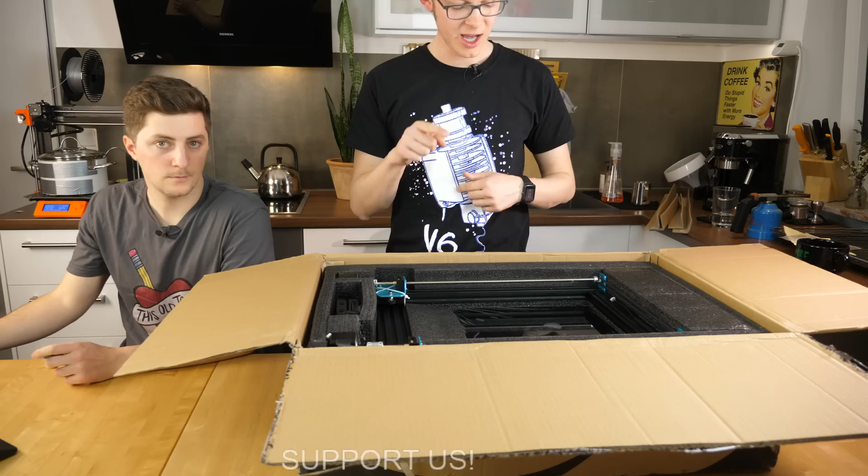That's going to be interesting, and I'm quite excited to see if it's also scary. Some parts right here, maybe - there, the spool holder I think. Oh yeah, yeah, tools.

That's nice, it plugs directly into the heat bed. I hope not, actually. Yeah, let's see. It just doesn't sound like a good idea to, you know.

I mean, every water heater you use to make tea or something is directly mains, but yeah, it's nothing. I'm not sure how it is in Germany and other countries with things you assemble yourself that are directly driven by 220. Yeah, it might be okay. I think, yeah, you're the electrician. Yeah.

Yeah, you want? No name. Are you streaming from Germany? Yes, we are streaming from good old Germany. We are streaming from the very south tip of Germany, actually.

Oh, beautiful foam packing, to be honest. That's really, really nice.

Damn it, should I take the box? Yeah, maybe, I just don't know if there's anything else in there. Nope, I don't think so. Do we have a manual? Ah yeah, there's a manual. Okay, you can give me the box. Yeah.

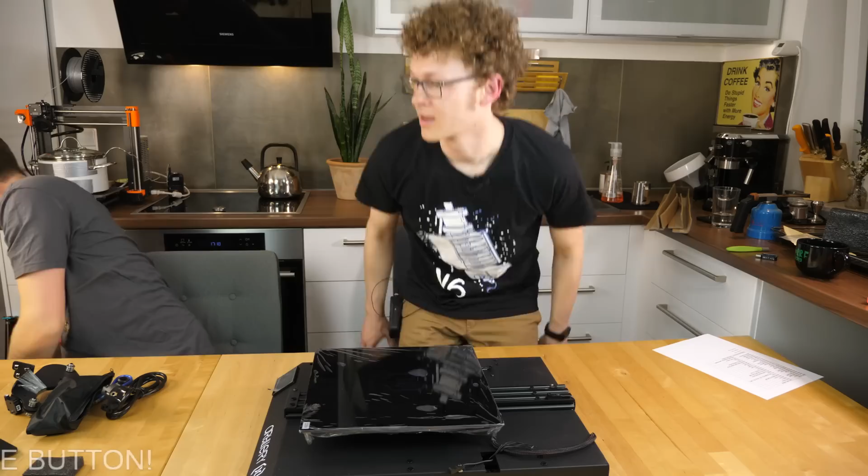Oh god, okay, I hear a screw in there. Yeah, yeah. Wow, oh okay, that's a big unit. Yeah, that's a really big unit.

So as I said previously, the nice thing that I already like about that machine is that all of the enclosure, all of the electronics, are enclosed in here, which is totally cool. We have the 220 volt bed, which is great.

I'm sure it heats up pretty rapidly. It should - they say right here in my cheat sheet that nozzle heat up time is under 3 minutes. Yeah, we'll see how that works out, and we'll also see how everything is protected.

Just for you guys, please enjoy that moment. That's why we usually have the close-up cam.

One thing that I'm noticing right now is that the USB and micro SD card slots are facing upwards. So I'm pretty sure you'd get debris of material or something into the card slot and then you're screwed. Could be, but it's also really nice that it's way better accessible than on other printers, so you don't have to fiddle around somewhere below the printer.

On the other hand, if you lose one of your micro SD cards in here - oh yeah, that's the next thing - it's gonna be gone. Yeah.

I think before we unpack the print bed, which is glass, or glass ceramic as it says right here in my cheat sheet, we'll crack open the electronics and take a look on the inside, because I would really like to know how they actually wired the mains, and what mainboard they're using and what drivers they're using.

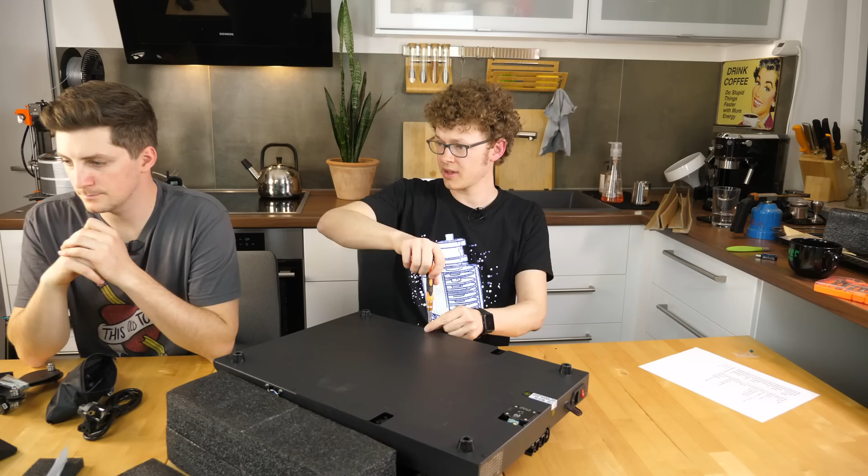Simox, what do I think about the JG Aurora A5S? I can't really say something about that printer because I have never owned one. So yeah, please ask other people there, I'm really sorry.

Someone's asking if the bed has an auto bed leveling sensor. Yes, it should have one. Could you say that again? I think I didn't hear it. Sorry for the pronunciation.

Do we see how many guys are watching actually? Maybe go out and get back in to see if that works. No, did he screw it? No, not yet, there's one thing right here. It says we got 330-ish viewers. Thank you guys, thank you for being here, that's a pretty awesome number actually. Cool, 336, that's even more. Thanks for watching everyone.

I really appreciate you all being here. One thing I wanted to mention, they don't want you to open the box right here. This probably says something like warranty void if opened. So I guess that's something with some kind of certification in terms of the 230 volts, maybe.

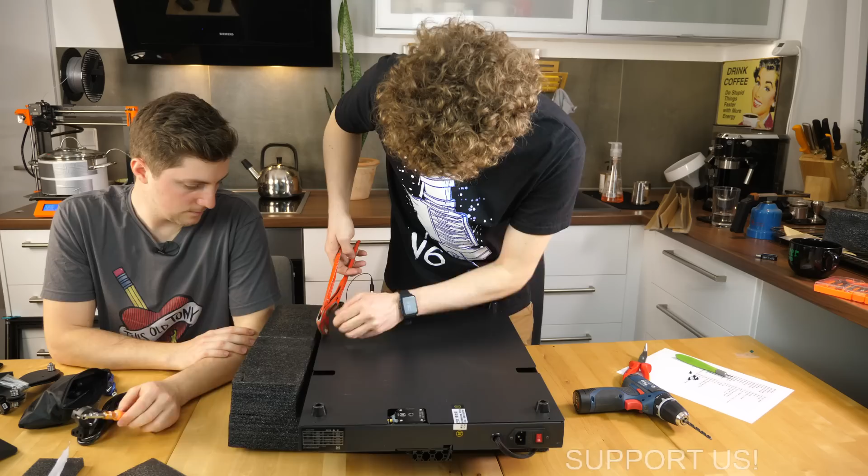Let's see if that is working. That is not good. Or you have a crappy screwdriver. Well that was close, no, I don't really think so.

Well do they have some tools? Oh yeah, do you think this tool is better, the Chinese tool than the other Chinese tool? We'll see. I think it's gonna be this one. Give it a try. Oh yeah, it's totally busted. That's not much screw left in there.

So we will bore it open just for the sake of science. And in order to avoid the chips, I even have a vacuum. Oh yeah, you can give me that. Oh wow, thanks for the $5 donation. Thank you, Robin, by the way, you got a very nice name, by the way.

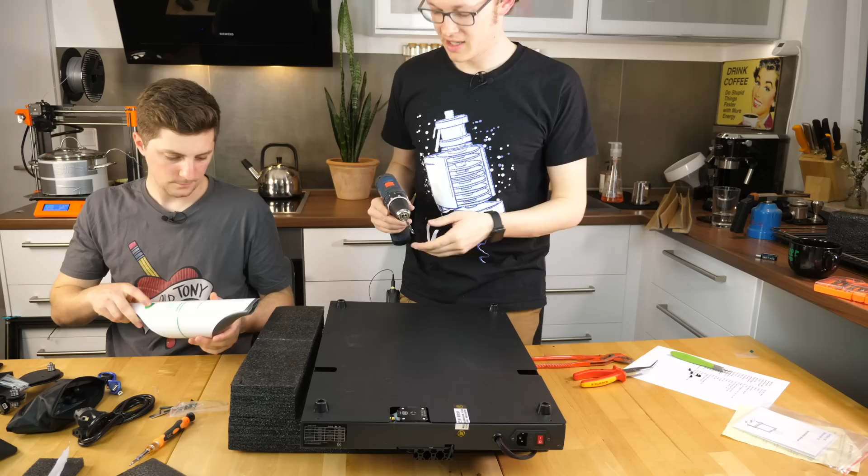Okay, so sorry for the sound. What the hell? Oh yeah, I don't know if... there's a turbo button actually. It is? I think the plus, the upper one. Oh, that's 2 buttons? Oh wow.

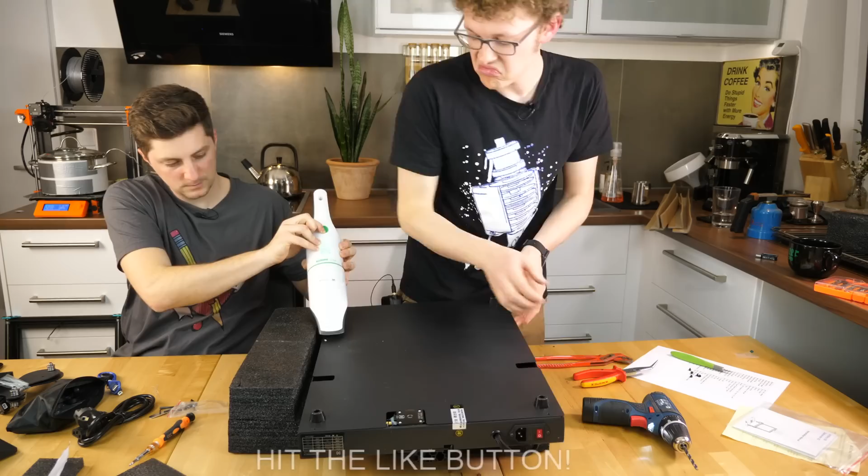Yeah, you got it almost. Okay, are you bending it? Yeah, I'm bending it, sorry guys. The noise is not bad, okay? That's good.

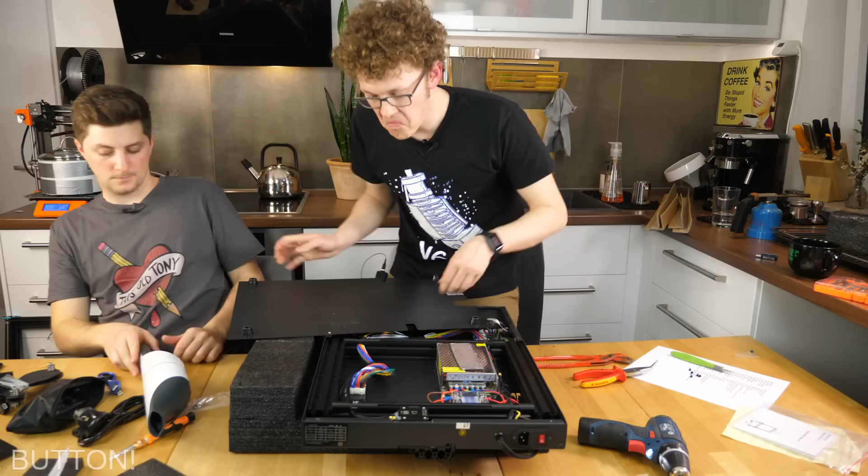Oh look, the electronics are on the opposite side, so that's good. But still, why don't you keep drilling? Yeah, I should probably just keep drilling. Industrial music, yeah, that's right.

Oh wow, there we go. I don't think that's one step in the user manual. That was the anti-tamper screw. This may be the mechanical equivalent to the magic smoke.

Yeah, okay, but he's a mechanical engineer, so I'm not worried at all. You're an electrical engineer, so we should be fine. So that's not my business. That's not your business. Okay, yeah, I'm really unhappy that we don't have

a small camera, but yeah, maybe let's give you guys an overview. It looks pretty interesting in here. I could operate the main camera. Yeah, well go ahead and see if that works out. That is the nice thing about being here, not alone, that you have a dedicated person. Do we have autofocus and all that stuff?

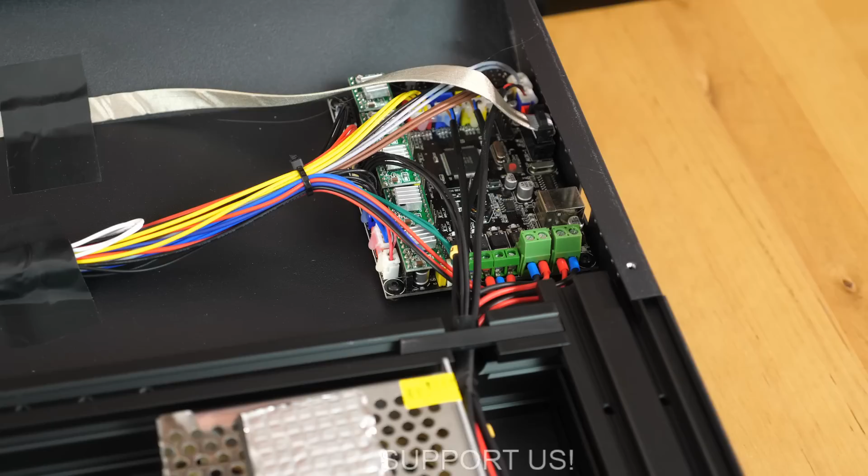But that would actually allow you to remove them and replace them with other ones, probably for quieter ones. But those guys were saying that they were already using quiet stepper motor drivers, so I suppose they might actually be Trinamic ones. But well, I don't really know.

For the sake of science, let's remove one. Is it not too tight? Don't strip it... no, it's fine. It says, it's not a Trinamic one, it says

FS31W0. So if anybody knows what an FS31W0 is, please leave a comment in the comments.

But it looks pretty good actually. The wires are taped to the case, and what I'm seeing from here is a second method to ground, to keep the covering lid grounded. But it seems everything is powder coated, so I don't think that this is really... it's probably more or less just so it doesn't touch and vibrate or make any sound. I also think it's against vibrational noise.

Yeah, I'm really happy with this in here, no complaints from my side. There is some hot snot on some of the connectors right here, but everything else is fine.

The only thing I would note, but I'm not sure if this is just in Germany, is that the neutral is normally blue and not red. If I take a look at the plug, we have a blue and a red one, so usually we'd have blue and black, or blue and brown. But yeah, they just didn't use two blue wires, I don't know, whatever.

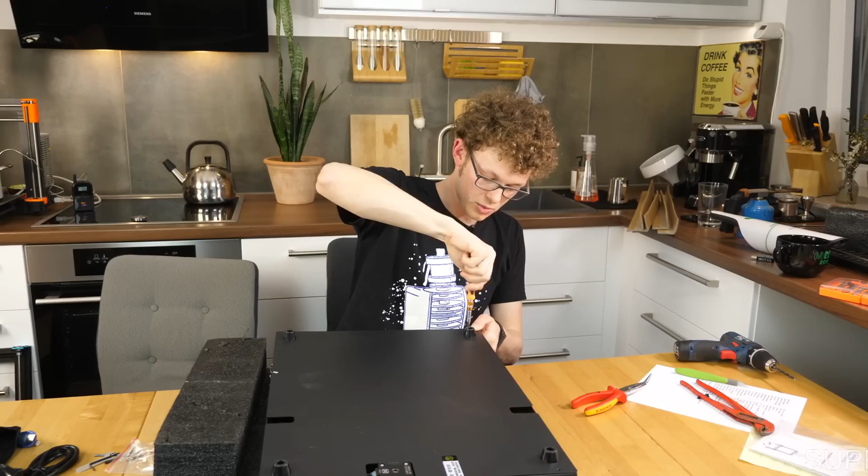All right, so much to that. Let's just close this up again, make sure we haven't totally ruined it. But as I said, this is just for the sake of you guys, so you know what's on the inside, and if you ever get one of these machines, you don't have to crack them open yourself right when you get it and void your warranty, your Chinese warranty, which I don't even know if it exists.

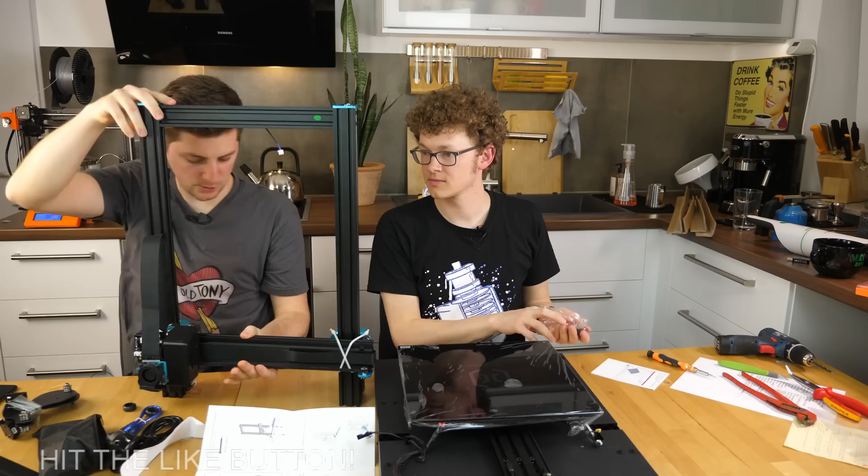Which is kind of sturdy, but it also has the rollers on the V-slot extrusions. The design is really similar to a CR10. As I said, the only real difference is that the extruder is different because you have a direct extruder, this long nozzle - the volcano style hot end - and you have a print bed sensor.

And they're using nice flat flex cables for the connections. As far as I can tell, the only 3D printed part is actually the fan shroud, or what seems to be the fan shroud - another one right here. So the holder for the trapezoidal nuts, that's also 3D printed.

I actually don't have a clue where Artillery 3D is coming from. Somebody said that they're somehow connected to Evnovo. I don't really know, so I don't know what their experience with making 3D printers is, but so far this is kind of a nice machine.

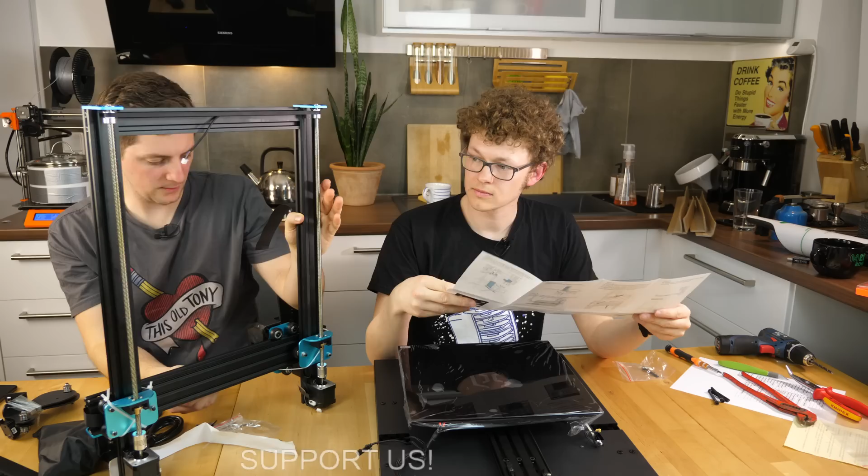I mean, the belt tension is pretty much non-existent. But that's probably something which is in the manual, which we have to configure and set up. How do we actually do that?

You got the screws, or are they in here? Yeah, I'll give you the screws. We'll tilt that and you can screw it in from... okay, you got it? Yep, I got it. Can you just tilt the box? Yep.

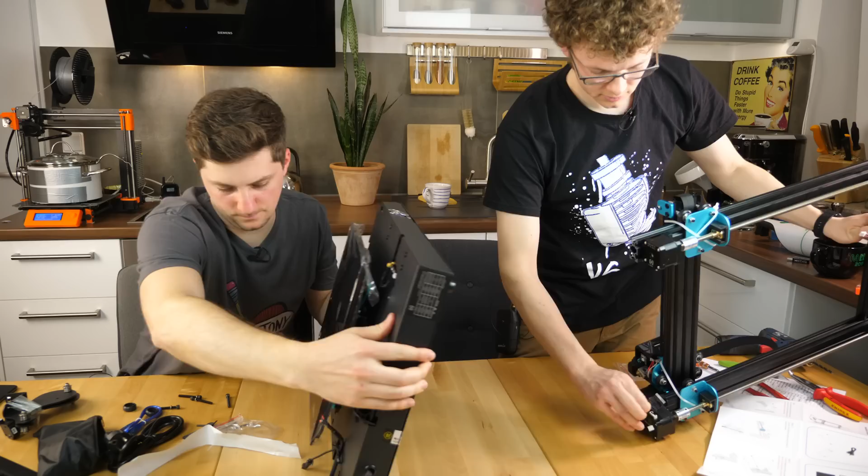Man, this is one heck of a printer. And the heat bed is insulated from the bottom, which is also a good thing - there's maybe a centimeter of some kind of foam, which is wrapped in foil.

Looks good. You actually tilted it the wrong way around. Oh, I did? You don't want to screw it in from the bottom? Nope. Okay, people would be laughing at us if we would do that - if you would try it. Okay, that kind of sucks. Can you just maybe put it at a 45-degree angle? Because I think...

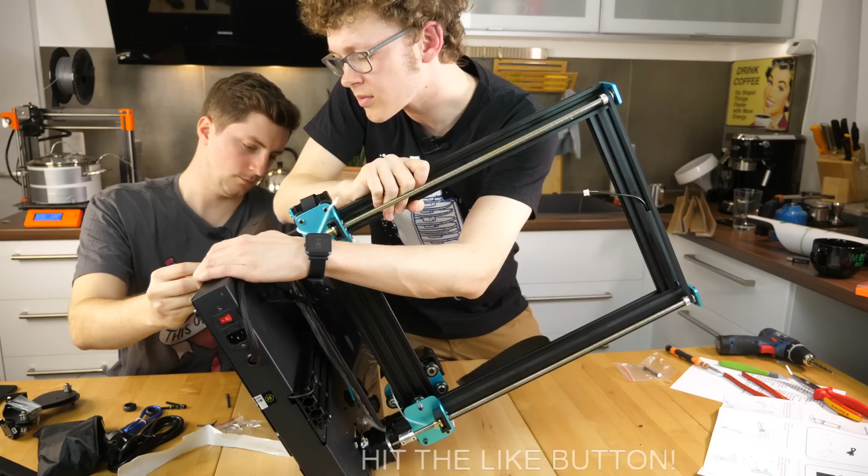This might be a step which is a bit tedious if you are alone. You got it? Okay, yeah. Is it biting? No, not yet. Ah, wait a second. Yeah, got it there. You go.

Putting these huge gantries in place is always tedious. This is also one of the things why I really enjoy that Robin is helping me out. Actually, I'm just here for the sous vide meat. Yeah, but these are actually the things I have to do to get it. So you always need to work for something, for your reward.

Another interesting thing is that we have 2 stepper motors for the Z-axis, which is nice. We also have a belt on the top to sync them, which is also really nice. I don't know if they use something special during the leveling procedure to get the whole x-axis perpendicular again. We'll see that later, probably.

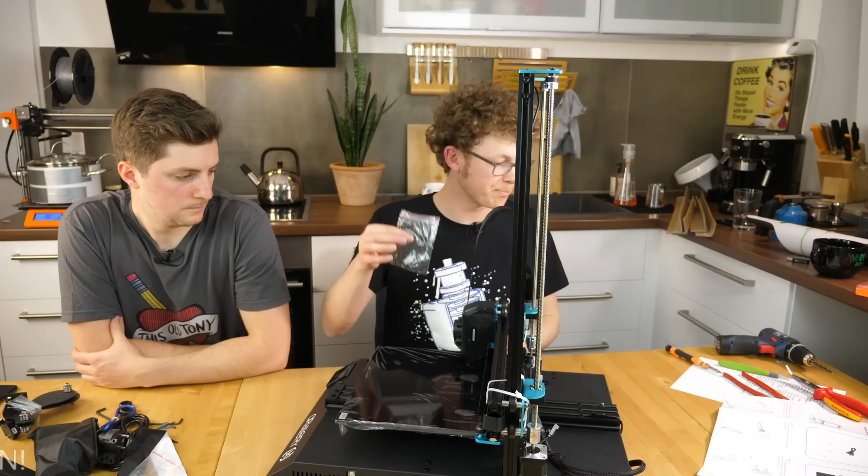Luke is asking what the zip ties are for. The zip ties are for holding the x-axis into place during shipping. We will be removing them later. They actually sent a spare screw, which is kind of nice.

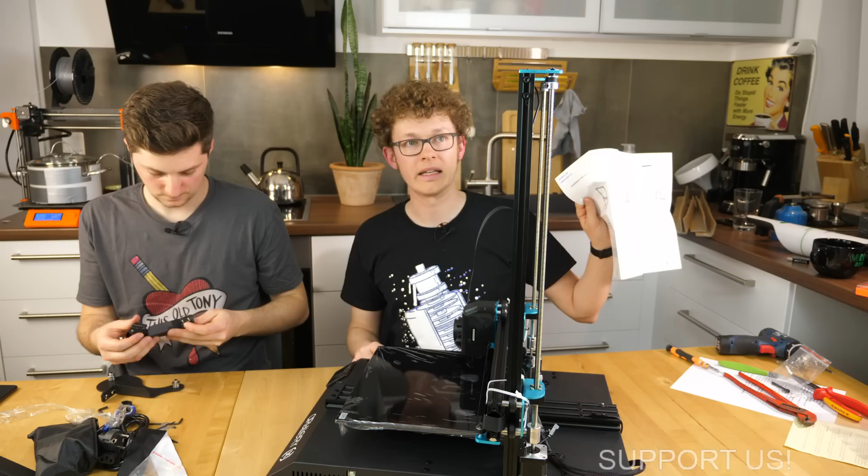All right, so step 2 is adding the spool holder, which is this one right here. So one interesting thing, I have already been assembling quite a couple of Chinese printers. Every printer had filament delivered with it, which I never used. This one does not have that. It's not the best thing for a starter, but since those Chinese filaments are usually not the best quality, I think it's kind of nice, and it saves me some waste.

And we do have a filament runout sensor right here, which somebody already tried to pry open with a screwdriver. Seriously, somebody tried to pry open this sensor. Interesting.

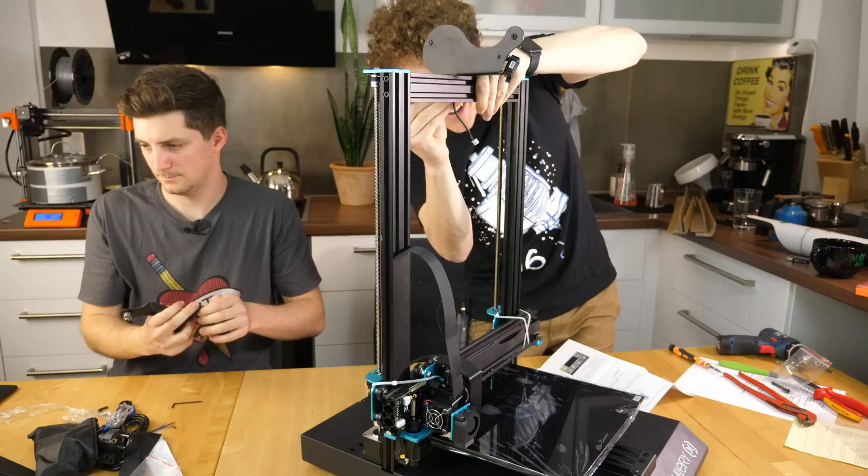So the spool holder front, let's see, let's turn this around. Okay, so this is the proper orientation for that picture. These right here go to the inside, yeah, just like this. You will need one of these hex keys. Yes, I will need, that's probably a 4mm one, the proper one. It's a really interesting looking spool holder. I'm quite excited to see how it's working out.

Confusing. If a belt synchronizes the axis, you can't move one axis independent from each other, but that's the goal actually, so you do not get out of sync with the two trapezoidal lead screws. So you probably need to set this axis right here up perpendicular in the first place. And then, I think what you could always do is, if you have to synchronize it manually, you could loosen up one of the, how do you call these again, the pulleys. You can loosen them up, and I guess it's not keyed or something, so you can turn it around. And once it's synchronized, once you level the bed or something, you just tighten it and it should be good.

And if one stepper loses a step, does it actually need a second motor in that case? I don't know, I mean it's a large unit. Maybe it just needs the power to accelerate or whatever. Because it's a Z-axis, you don't actually need it, right? Yeah, actually you shouldn't need a second stepper motor because that's kind of over constraining it. But in terms of power, it's maybe better to have two. Well, actually, if you have a synchronization belt up there, and one stepper loses a step, you're not saving it, because I don't think the belt is like...

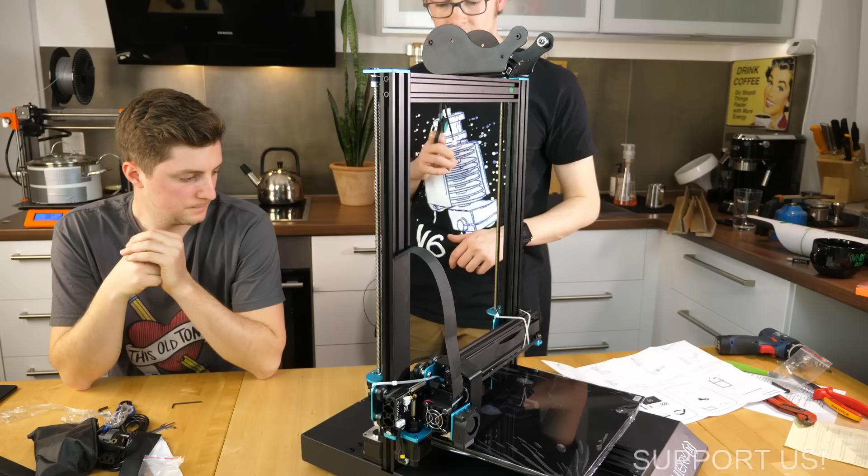It has to lose many steps until the belt catches in. So since there isn't any material delivered with the unit, I will take the spool of Prusa PLA from the Prusa, and we will be printing the first print with that one.

The thing I don't like about that spool holder is that if you have spools with a different width, you always need to adjust the distance. It's hard work, you have to get out your tool - it's not a wing nut or something, you just have to get the tool and adjust it.

What's the next step? I just found something - electric shock hazard. Never open the electronic space of the printer while it is powered. Before removing the access door, always power down the printer and unplug the AC cord. Burn hazard, fire hazard, pinch hazard, age warning - for users under 18, adult supervision is recommended. By the way, it says it has 16 kilograms on the data sheet.

What's that doing? 600 watt power consumption. That's a lot.

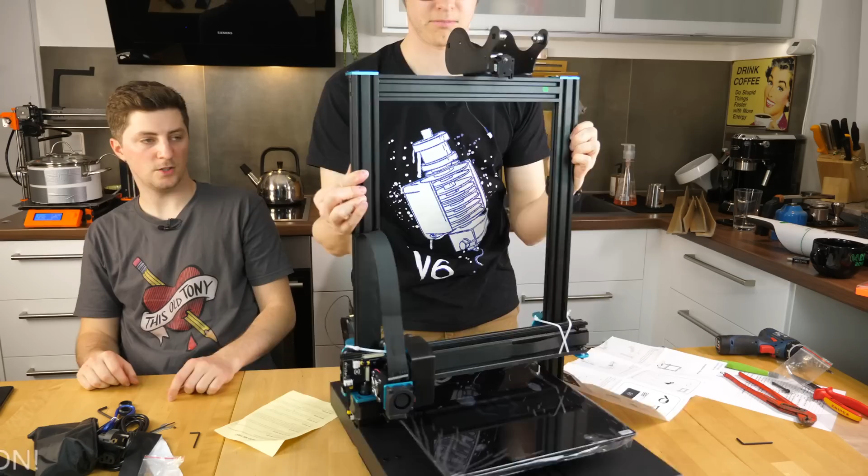This is actually a bit stupid, because the cable is right here in the back and the sensor is in the front. Did you mount it the right way around? I think so, because the filament has to go down here in the front, but the cable is here in the back.

600 watts, is that from the heat bed? The heat bed is 220 volts, so it's mains. If you heat that up with 600 watts - it's the hot end and the heat bed. So maybe it heats up pretty fast.

I'll just leave this out. Then there are more connections which we actually need to make. So we still have to plug in. Should I operate the camera again?

Guys, you want to see that in close up? Okay, so we have the stepper motor down here, which we have to connect. Let's see, should be going in there this way. Come on - 600 watts is max power consumption.

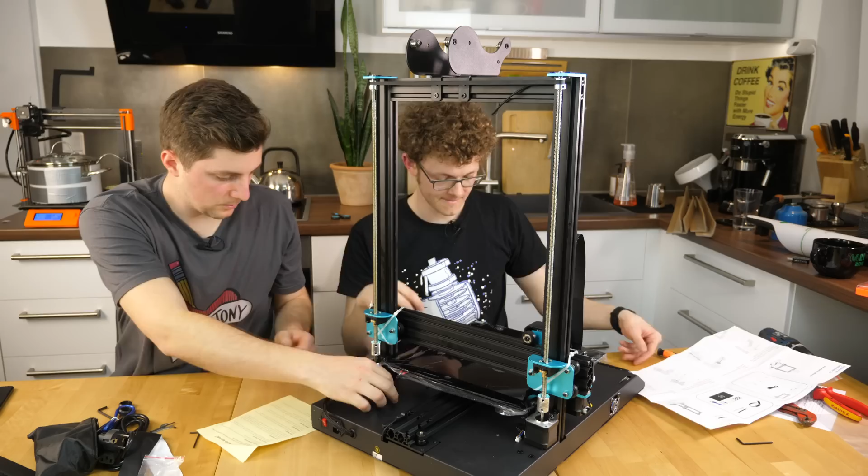So the wires down here are actually not the longest, but they just fit. I'll make this side. What is that actually? Is that a limit switch? Yeah, that's the limit switch for the Z-axis, which we probably need to install in the next step. Which is inductive - yep, it is.

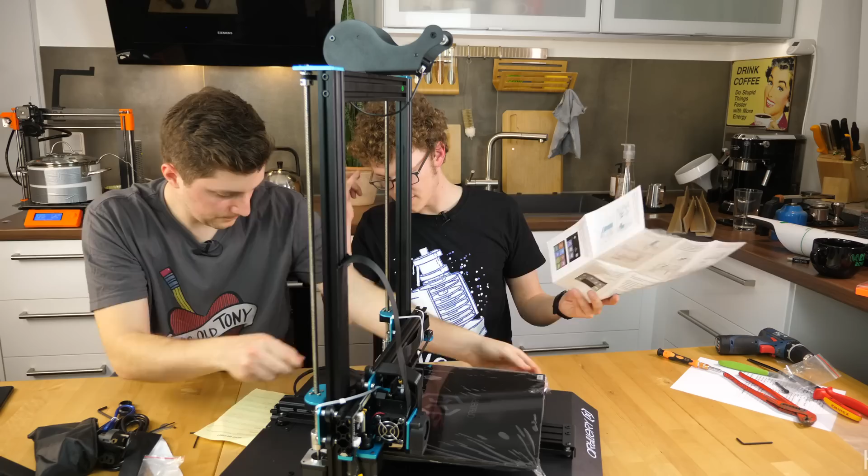We need to have it in the front because we need to mount it right here in the front. Sorry guys, this is something I think you cannot see. I'm really sorry, the second camera is still not working. Inductive, really? Yes, seriously.

I haven't seen that on a printer this price. Usually we have mechanical switches or sometimes optical ones, but these are inductive sensors.

The big question now is, which is the proper height for the sensor? The distance between the sensor top and the base should be approximately 75 millimeters. I don't have a ruler. Oh, you got the huge one? Where are they, wait a second. I'll just get a ruler.

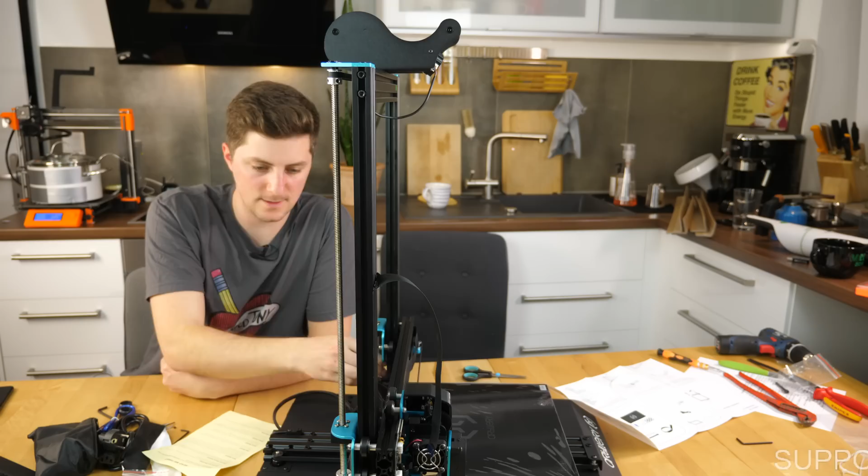Well, what I'm seeing right here is, I guess - oh no, it's not missing, it's just... And look, by the way, if I just turn one Z-axis, like this trapezoidal thingy, the other one turns as well. So I guess the synchronization is just while the printer is offline, maybe, so you don't get out of sync.

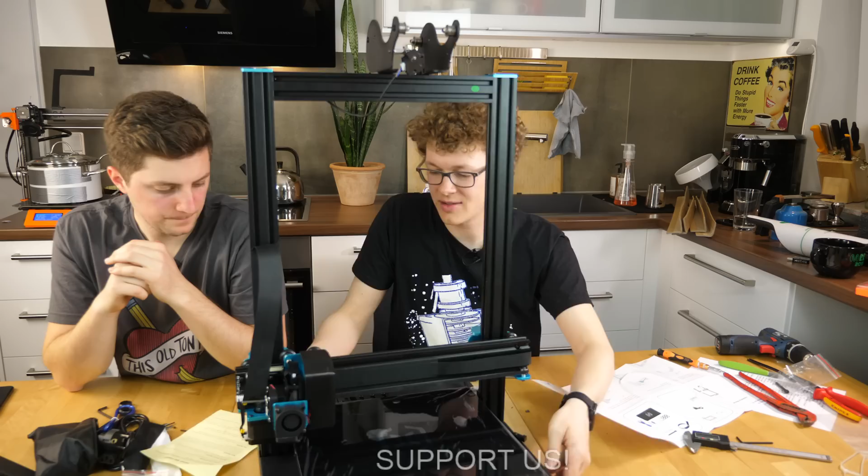We still have to connect the flat flex cable. Yes, I think that's gonna be in another step. Should we actually? Yeah, let's remove the foil which is on top of the print bed.

Enjoy that - it's nice and shiny. I don't even think people can see that, but sorry. I don't know why the second camera is not working.

Can you see that? Just remember, we got one screw less than before, so do not try too hard. Well, the screw we drilled out before was just for holding the cover in place, so I think it's fine.

Anyone knows what controller board is used in this printer? Have you seen the main microcontroller which is on the board? Actually, we got two boards, just to say that again in case people missed it. One is driving the display, and the other is responsible for controlling or driving the steppers. But we did not see any genuine markings. Somebody was mentioning before that the main board is an MKS 1.4. Okay, Andrew is saying MKS Gen L 1.4. Perfect, thanks.

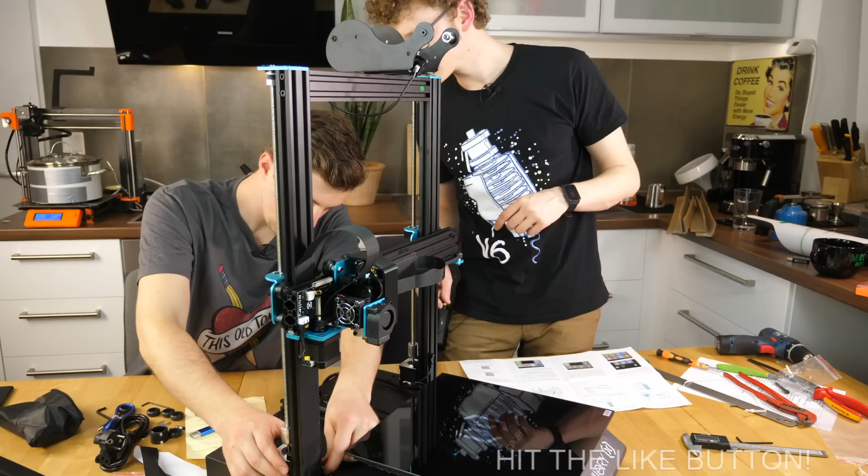I really like the solution with the flat flex cables. My first 3D printer, the Mendel 90, already used flat flex cables, and it's a really nice and neat looking solution, and it's still capable of handling quite some current through it. Because it has many wires, and they often use like 4 wires for transferring high currents. The thing is, it's taped right here, and you have to seriously bend it to get it in there.

Do you actually want to run the other wires over the flat flex cables? Yeah, I mean, there's enough space to get it behind, but let me just get it out again.

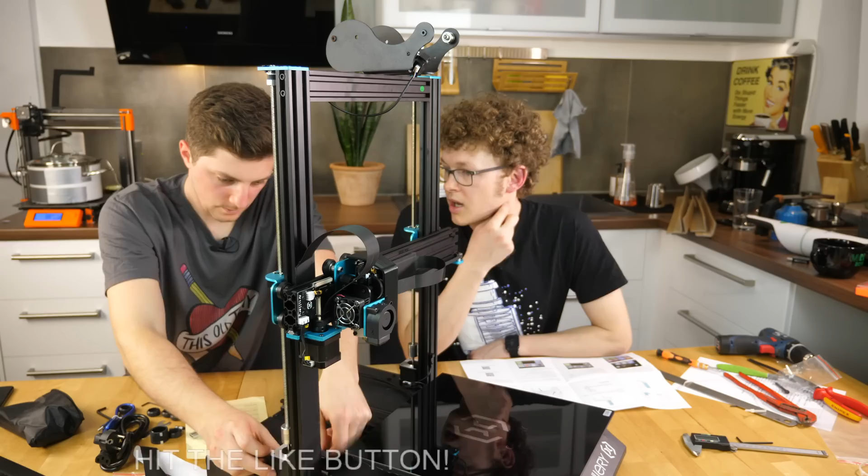Hello Chris, doesn't matter if you're a bit late. We're still working on the machine, nothing's printing there yet. The sous vide is still in the pot. We're gonna have that later, as soon as it is printing.

So we are actually going towards summertime. Are we going to have a barbecue livestream later? I was already thinking about doing a livestream outside at some point in the future. We'll see, if you guys would enjoy that, let me know. I don't know what my neighbor's gonna say. I think we're not gonna see many downvotes on that.

So this is actually not so easy, to be honest.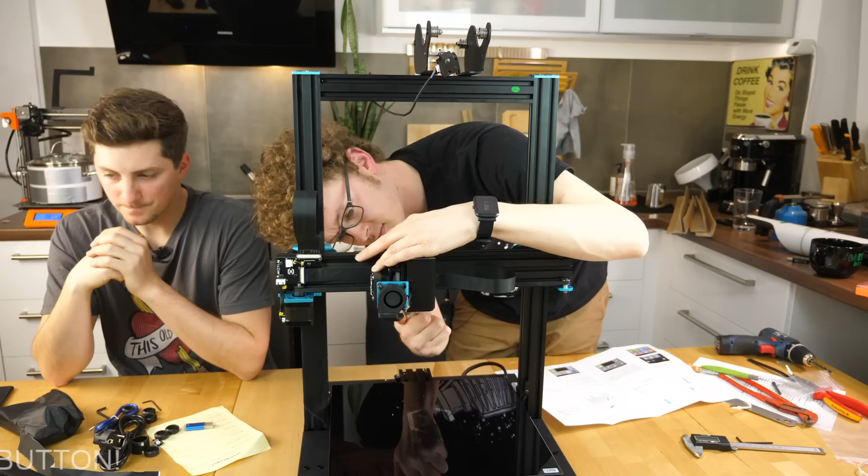Are you sure? I mean, the place is getting worse and not better. Yeah, I don't really know if I'm just too stupid to tighten the nut, but somehow this is still wobbling around. Oh, and this is already quite bent. Oh yeah, that's genuine brand. What is it? It used to be, I think, a 10mm one.

The question is if I get some proper tools, and we'll probably open that right here in the front. That sucks, do you need to get some tools?

Yeah, I'll probably get a proper 10mm, how do you call it, spanner? Spanner, I think it's spanner. Wrench? I don't know, how do you call that actually, how do you call this kind of tool? I mean not this tool, but a decent one. Because this is like, I don't know how you call that metal, it's sheet metal, 1mm or something, which you can, I don't know, it's pretty soft.

A wrench, yeah, is it a wrench? I thought a wrench is just, you know, the one where you can set the direction with the nuts, you know? That's a monkey wrench. You mean, okay, how do you say it in German? Eine Ratsche.

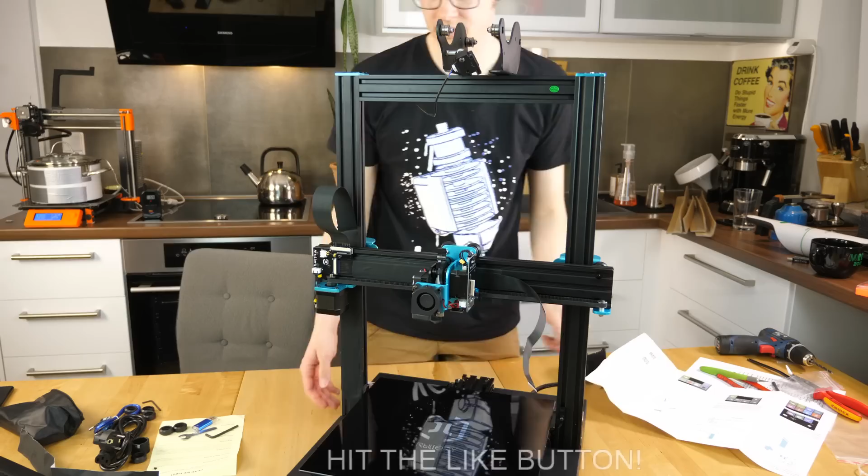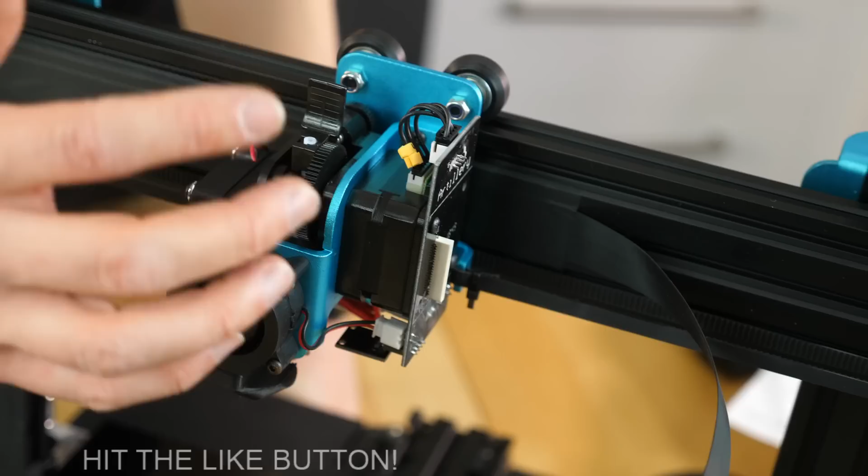What do you want to show? Just the extruder assembly. One nice thing is that we have a pancake stepper right here that helps reduce the weight on the x-axis. That's better for accelerations and also reduces the amount of ghosting you'll see on your prints.

This right here is a Titan style extruder, which has a gear ratio - I don't know exactly what they're using, but it's quite high. This is also why you can get away with such a small stepper in here, because this one is just rotating faster instead of using a bigger one. So it has less torque, but faster, so same amount of energy. Why would you do it another way around? Because steppers get really bad at high RPM - the power of steppers gets really bad there.

So this right here is a plastic gear. This is honestly a bit disappointing, don't you think? I don't think this is actually metal, this is pressed in here. So I think that this is also plastic - I'm quite sure. This would be a bummer.

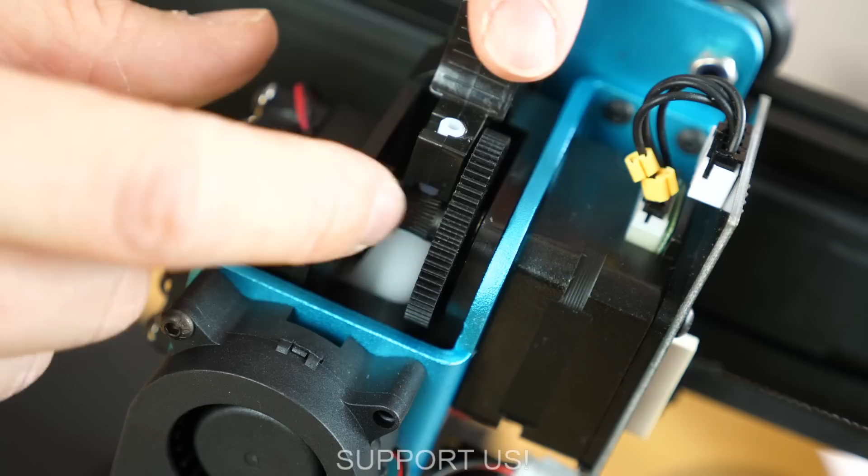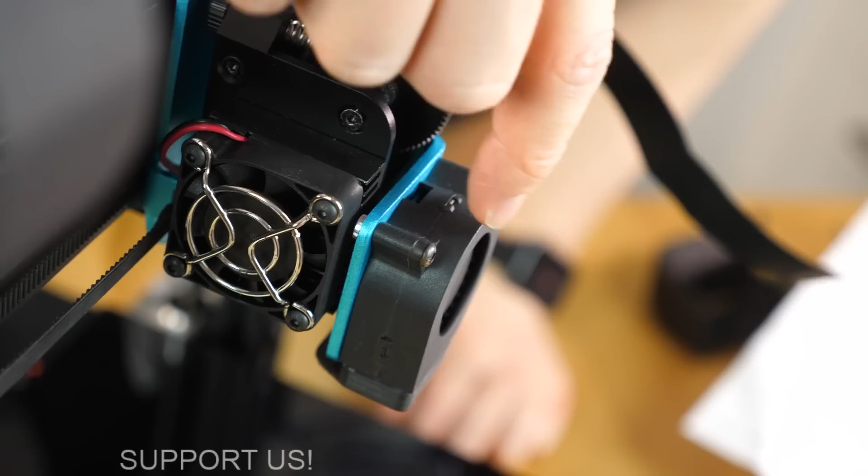To be honest, the hot end is cooled by this little fan right here on the side. The radial fan here in the front is used to cool your prints.

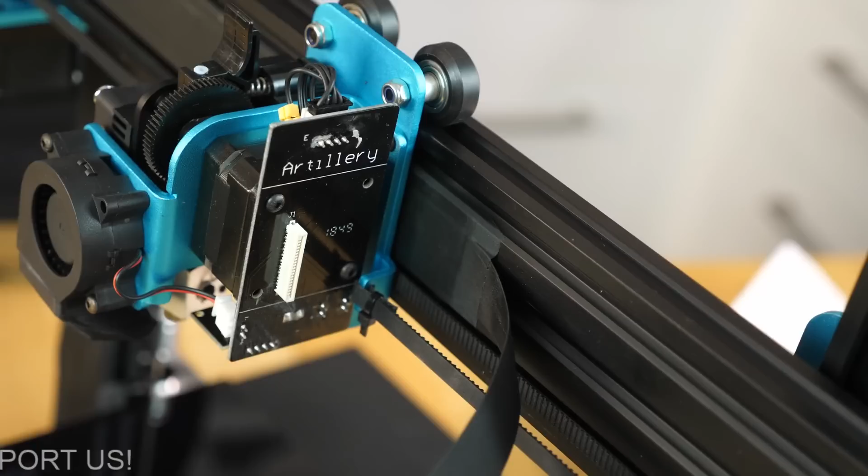Let's turn this around once again. What you can see down here - this is the Volcano hot end. The Volcano hot end means it's like double or 3 times the length of a normal hot end, and it helps you, especially with high flow rates, to get all of the material melted. So you get a longer distance, more time for the material to get melted. Exactly, the melt zone is longer.

But that also increases droop and zits and things like these. So I don't know if it was really the best idea to put this hot end on the printer. If you tune it properly, it should still be fine. Okay, yeah, otherwise it looks fine.

So what do you think? Could you try to just put a genuine E3D hot end on there without it being too large a project? You should actually be able to, since they're using a Titan style extruder, just use a normal V6 hot end on there. The length could be an issue though, so I'm not 100% sure that works out.

Speaking of bed leveling, I don't see a bed leveling sensor on here, to be honest. Should it be capable of bed leveling? I think I read something - maybe just an assist or something, you know? Not actively - bed leveling, it says manual right here on my cheat sheet. Okay, so no automatic bed leveling on this machine. So far so good.

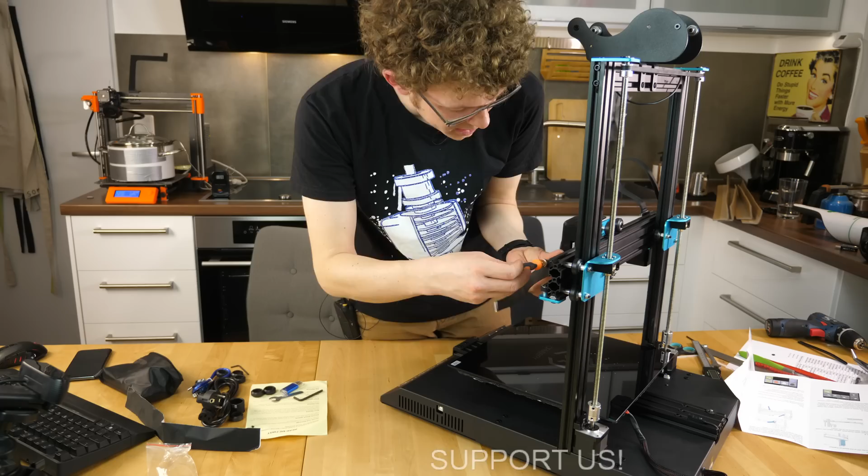Let's also see how - yeah, the only thing I actually do like about 3D printers is when they don't have the bed carriage in the middle, but one left and one to the right. It's just a bit more sturdy, especially when you have such a large bed.

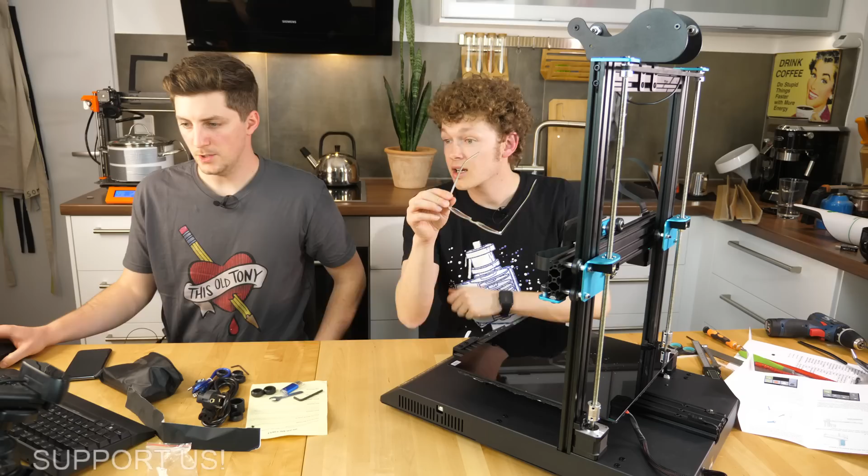Okay, sorry - manual bed leveling, not in 2019. Well actually, I have a printer right now which we leveled once, and I never had to re-level it again. So I don't know, is it a big deal to not have auto leveling? If the glass is flat, I'm also not a huge fan of automatic bed leveling.

Yeah, it also does have a glass bed. I mean, one thing is if you change the nozzle very often. And this thing is really flat. Yeah, I can't complain there. As we said before, the bed is actually insulated from the bottom, heat insulated, which I think will be pretty good, especially in this size, to maintain the heat.

Okay, so I'll plug it in and then we give it a go. And we hope. Are we hoping for magic smoke or not? Well, I'm hoping for not getting electrocuted. The thing is, however this printer is performing, the sous vide is gonna be good. Well, you don't know that yet. I don't know that yet, but I know you, and I know the channel is named CNC Kitchen, so I'm pretty confident.

Okay, no smoke. I got something on the display. Is it a touch screen? It has to be, a touch screen. It's quite dirty already. I guess I will go to the camera again to show the menu. Oh, no files found. What do you think?

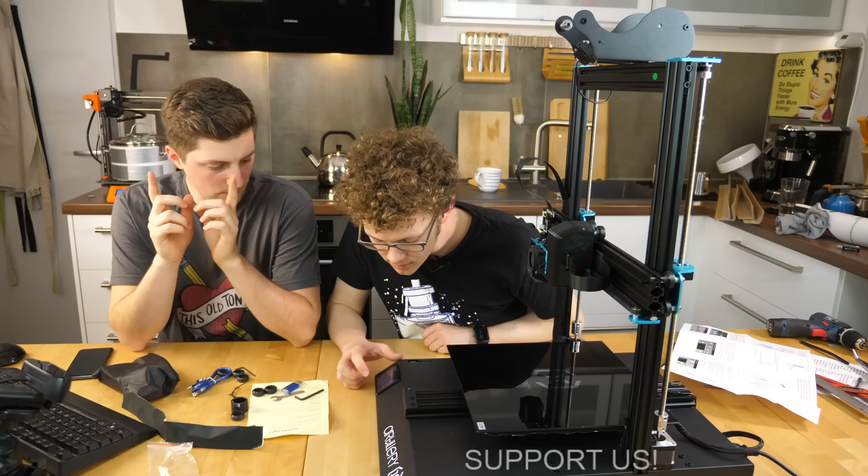So how do we? And what I liked about the last one, the Anycubic i3 Mega, or how was it? I something? Mega S. Mega S. They actually printed some sheet onto paper which has the exact size that you should level. So you could take it directly to level the printer, which was good.

Where do I heat? Okay, we want the extruder at... we got feedback from Artillery 3D here. Also, the Z stop should be on the outer slot of the extrusion. Sorry, on the outer slot of the extrusion. Which is, look, this one here. I think it has to go one slot to the other. So, thanks for the feedback.

Yeah, you're totally right there. That prevents us maybe from crashing into... what is the difference actually in... I actually don't know, because it still doesn't hit the... Oh, maybe he does mean like this one. No. No, okay, shouldn't go there. The most important test is if we can get sous vide on it. So the thing is, on one picture, it shows that the sensor is on the left, and on the other picture, it shows the sensor being on the right. I think that's why I mixed it up.

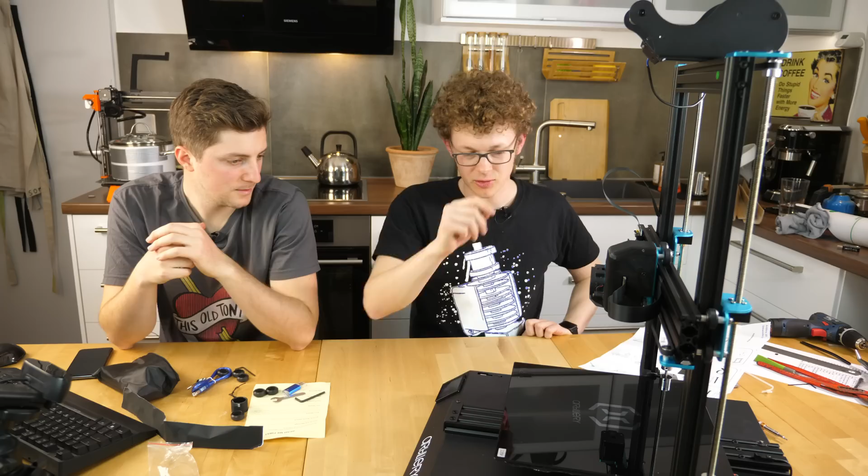28. Do you have one of these heat gun measurement things? Yeah, but that's not really working on glass, I think. What we also got is one of these strips. That's to cover the belt. Yeah, so this is actually the arsenal you get as spare parts, I guess.

Actually, it's the most used word on this stream. That's actually true. Yeah, thanks for letting us know. I'll try to reduce the amount of 'actually' I say. So we are already at 52 degrees Celsius.

We have to level the bed. You're heating up before? Yeah, okay. Maybe let's change the camera angle again before we are leveling the bed. You want to put it down a bit, or? Yeah, well, probably. So sorry guys, somehow my second camera is not working today, so we have to work with the main camera.

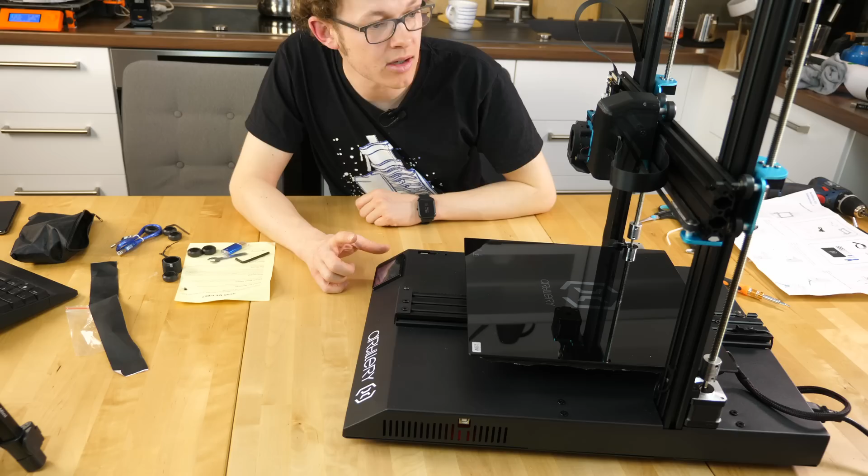Okay, so the heat bed is warm, I guess. The hot end should be at 210 degrees Celsius, so we can go to the leveling procedure. Probably let's home the printer first. Home.

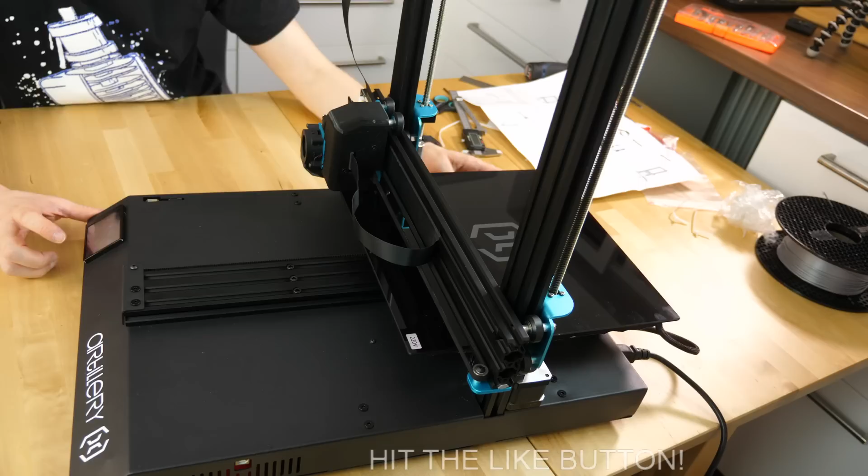Okay, that's quiet. Oh, that's really quiet. That's seriously quiet. Wow. You can't hear it. That's really nice. The Z-axis is a little bit louder, but I think that's due to the vibration. And the speed, it will never travel that speed while printing. Perfect. Okay, but this is seriously quiet. The noisiest thing is the fan, which is down here. Yeah, that's the thing with having small fans. The small fans are always pretty loud.

Okay, let's level the bed and go to the first corner. Okay, it does. Okay.

If you hear a machine like that with that quiet operation, it always sounds very high quality. That's something really nice which we haven't heard from 3D printers until now. They're getting quieter and easier to use in the office. The only fan which is still annoying is this one, but the stepper motors are really quiet, so there's nothing of that loud noise.

Okay, second. What I also really like is that they are using quite fast movement speeds, because I sometimes really have the impression that the default speeds are so slow and it just takes so much time.

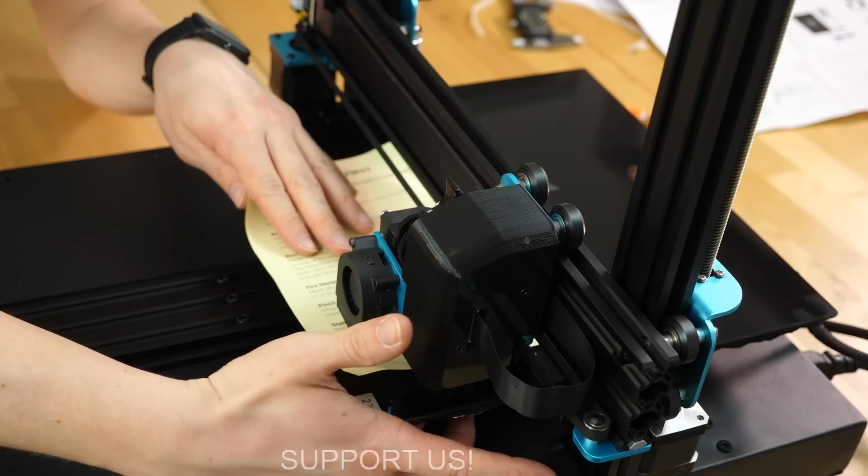The leveling is a bit tedious, to be honest. It's kind of hard. But you are in an awkward position right now. You could actually put the printer towards you a bit more.

Uh-oh, next to the mains wires. I'm kind of scared, let me just back up a bit. It's a bit scary with the 220 volt heat bed. I mean, it's probably safe, but I don't know if we still need to get used to that fact.

I love how quiet it is, seriously. Tom, thanks for being around.

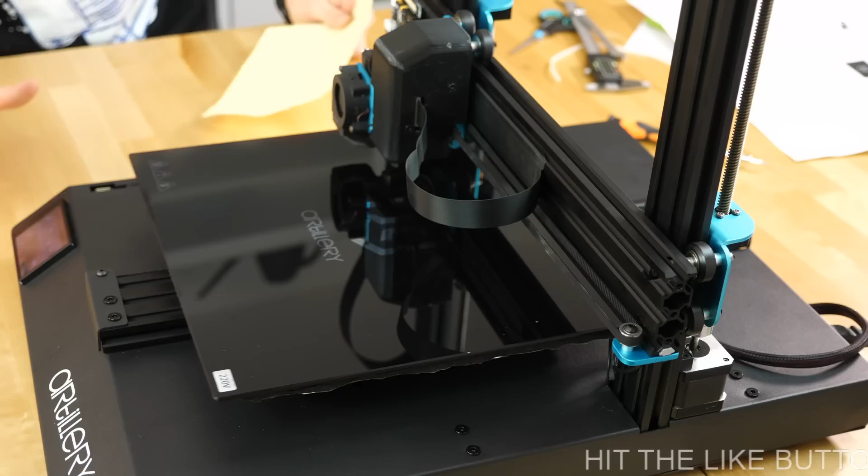And the fourth corner is also really nice. So even though it's tedious leveling the corners manually, I'm still quite a huge fan of manual bed leveling if you have a flat bed, just because you don't rely on software to make your bed flatter, to compensate for it. Better to make it right in the first place, and then you don't really have to bother with that.

That looks good. So are you going around the corners all the time until you're happy with the result? Yeah, you usually go around twice, but since we didn't adjust that much at the moment, going around about 1.5 times should be okay. All right, so the bed is level.

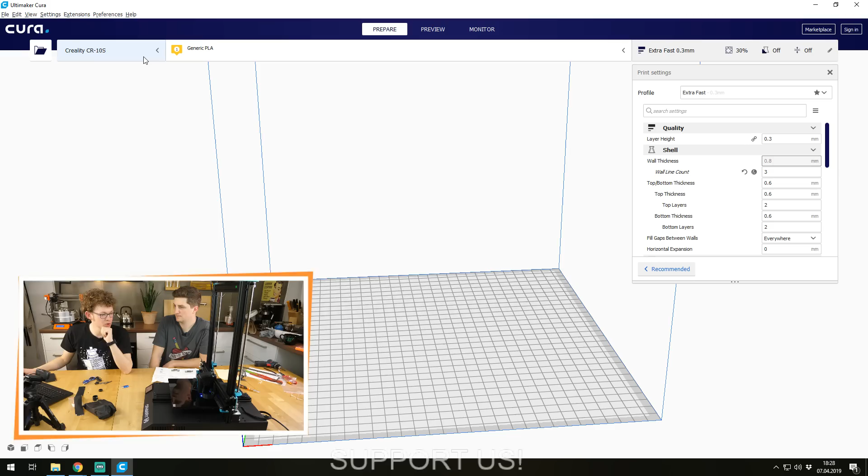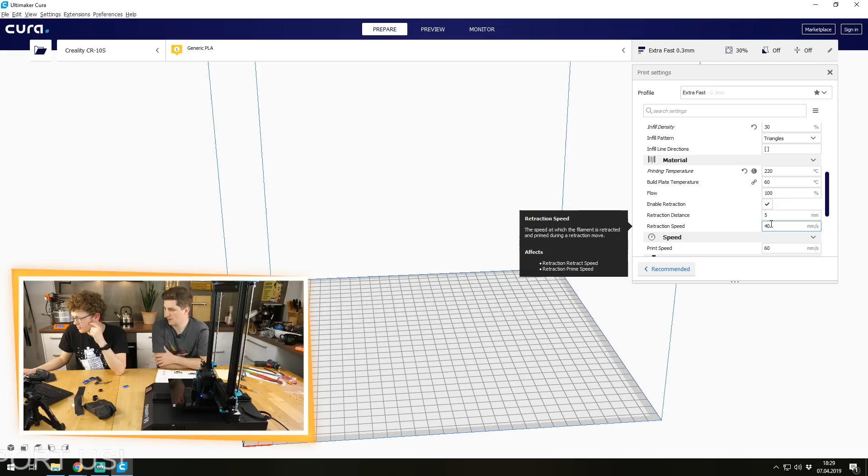Okay, as I said, I think it's not really necessary to use the Slic3r profile for a start. I'll just start with a Cura profile for a Creality CR-10S, with the only difference that I will reduce the amount of retraction since we have a direct extruder right here. Are we sharing the screen or no? I think we're sharing the screen.

Do we? Oh, it's making an update. Ah, that's good. Yeah, we're sharing the screen.

Okay, so I am in Cura. I'll go to my downloads. Just for the sake of time, let's just start with a normal Benchy. Look how small it is on that huge build volume. Yeah, it really is.

Let's use normal printing speed. Let's get the retraction down to like 1.5 millimeters. That should be fine. 200 degrees on the nozzle, 60 degrees on the bed, 100% flow.

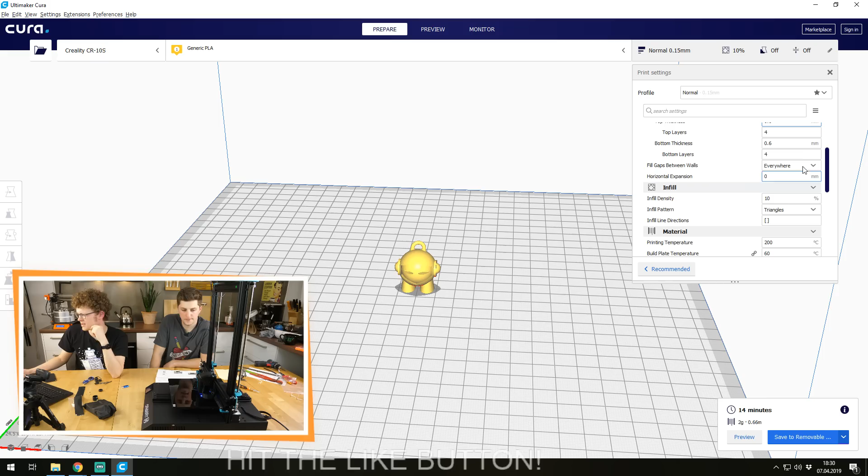Perfect. Do we have to? Well, we have to still add the filament there. That's done in full. Okay. Save to the removable drive.

So can we plug in a USB stick right here instead of this SD card? Yeah, I think that's the deal. We should actually be able to plug one in. That's what I think.

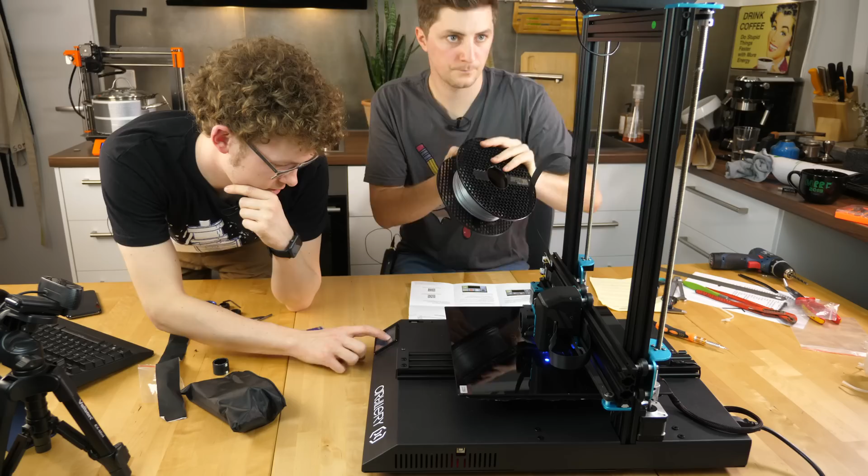Marvin. Okay, so we need to load the filament. Let's go into tools. Let it go through the filament runout sensor. Yeah.

Do we need to like? Yeah, we need to cut it once. There are scissors right here. Oh yeah, that's the mechanical engineer cutting with the scissor. There aren't any snippers delivered with this printer. I think that's actually a first.

Bend it a little bit straight. That usually helps. Just like this. Yeah. Okay. Get it in there.

What was your first 3D printer? What was my first 3D printer? My first 3D printer was a Mendel90 I bought from the one infamous Nophead. Nophead, Chris, I don't know his last name, but he is one of the big guys in 3D printing from a couple of years ago. He unfortunately doesn't sell them anymore, but it was a really good printer. I don't use it anymore. Do you still have it? I still have it in the basement, and I don't really want to give it away or something like that because there are lots of memories connected to that printer.

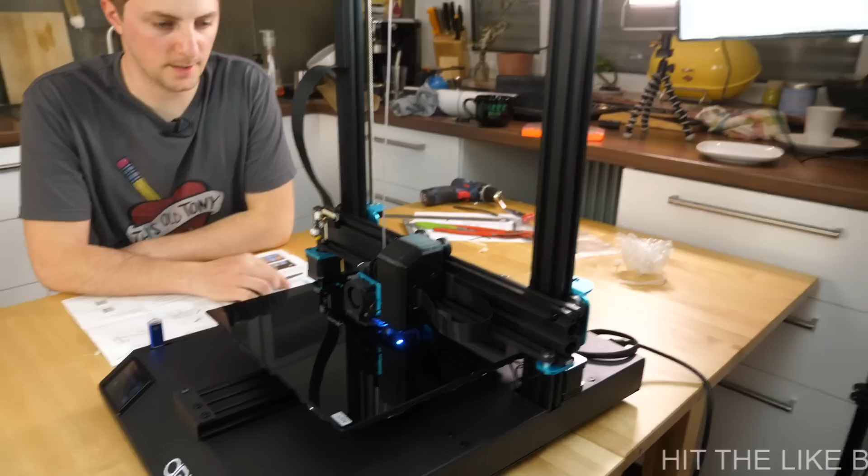Let's maybe rotate the camera a little, so the other guys can see what's going on there. It's normal. Well, I don't know. It's normal. I don't think so. Yes, check the cable. Yeah, let me check the cable. I think it's the one down here because I had trouble getting it in. If you remove it all the way?

No, I won't remove it. I'll just... It's always a good thing using a couple of scissors to get a cut. He said something about you didn't unlock it first. Oh yeah, seriously. It's spinning now? No, it's not spinning, but there is an unlock mechanism. But not at the bottom, just at the top. And I think the top cable is in there.

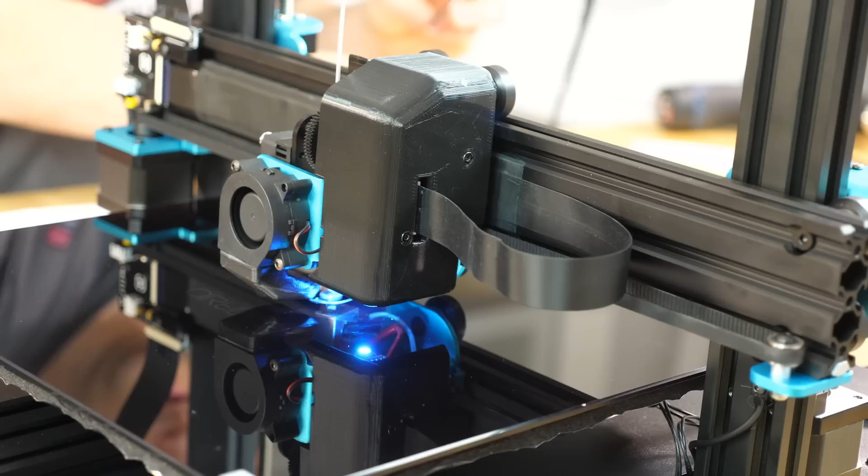Yeah, it's not running. I don't think that's good. I believe the bottom connection is just fine.

So the front fan is working. It's also really nice and quiet, but the hot end cooling fan is not working. And this could probably cause problems in a couple of minutes when the filament is getting too warm. I don't really know why this is happening, I guess one of the flat flex cables is not in there perfectly.

Since I didn't properly clean the print bed before we started. Okay, so the issue we are having right now is that the hot end cooling fan is not working, and it's getting pretty warm.

The other possibility is that the connector right here is not properly plugged in. The cable down there is in perfectly. Okay, let's check this one, because it has a release mechanism right here.

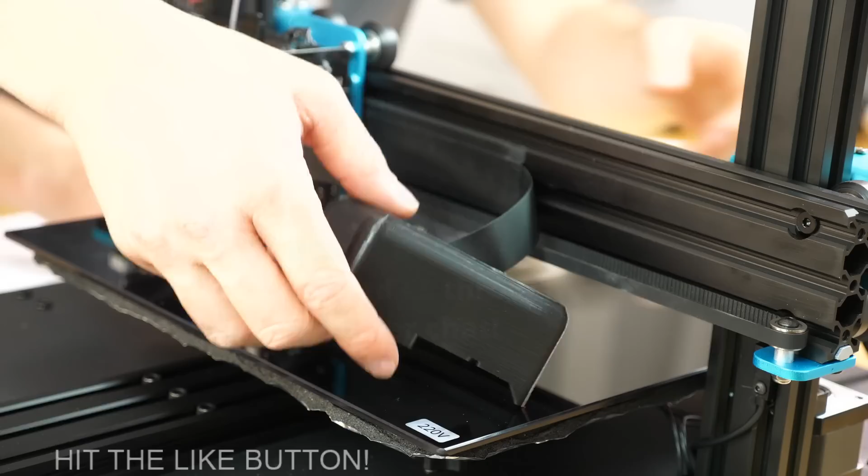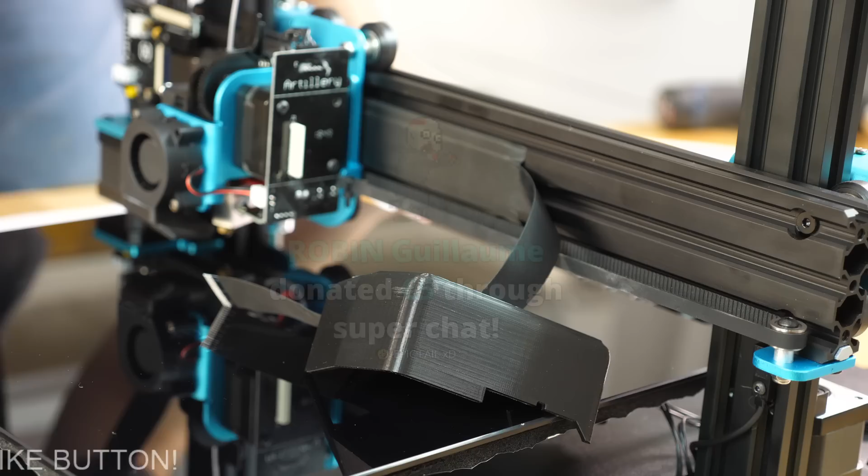Yeah, we should really take care that we don't burn our fingers. Can you maybe just switch the printer off? I guess we will not get any heat creep more than with a non-running fan. So what about the cable? There's no release mechanism on there. Yeah, I unplugged that, I just want to check if...

Epic fail. Thanks for the $5. Yeah, I mean, that's why you are here, right? To see something like that.

Okay, so this is the front, that one is plugged in properly. The other one is plugged in, it's right here. Should I maybe get a multimeter so we can check if the fan is bad or if there's something wrong with the connection? If you got it on hand.

Yeah, shut the power off. We did that, the power is shut off. I just turned it on again because there was a feature to turn on the fan. Maybe let's see what happens. Probably that's for the part cooling fan. The hot end fan should be running all of the time.

So let's see, fan. I'll just crank up the fan speed. Nothing is running. Oh yeah, it's just the front fan, that's the problem.

Okay, I suppose the fan should be running now. So it is, if you go the one in the middle. Yes, it's the one in the middle. Okay, so we should have 24 volts on this one. Let's check for 230. No, nothing. Should I turn on tools, heat?

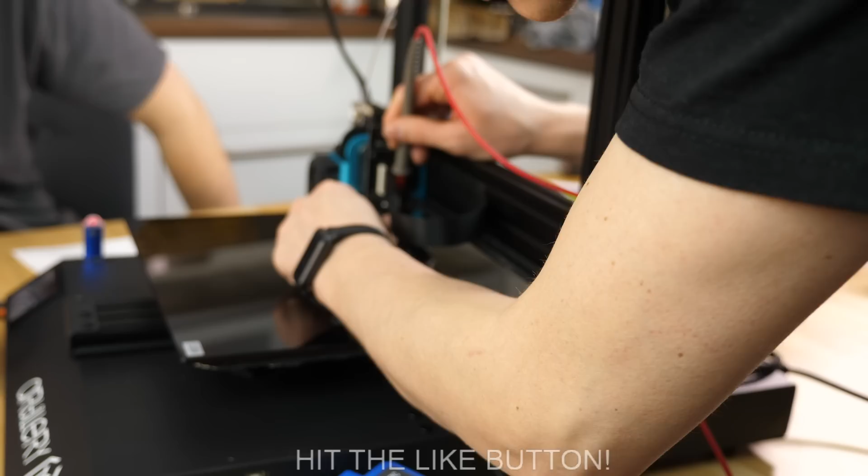Yeah, we have 24 volts right here. Oh, 24? Yeah, it's a 24 volt system. But we have nothing at the part cooling fan, so the problem is not right here. Well, let's just turn it off again, maybe.

Let's just re-plug all the... that's the thing, we said it before, if you get debris or something in there, in this flat flex connector, you're in trouble.

Connected to your home network, yeah, that's something. I can do that while Stefan is playing around with the wires back there.

Yeah, the flat flex is a bit fiddly, to be honest. Okay, you have to take care that you don't bend it too often. Yeah, I know.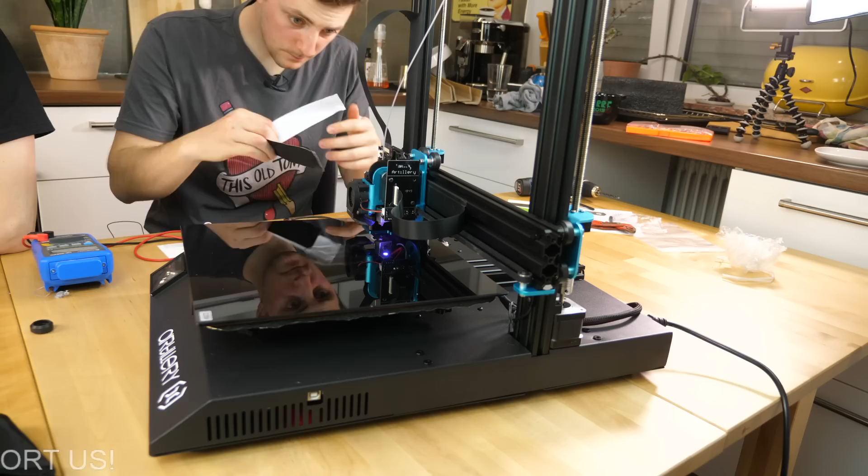So one thing you can currently see, I don't know how it is really working out, but there is an LED down here, and this LED should actually indicate the temperature of the hot end and the temperature of the print plate. I can see that.

Also another thing, I don't know if you can read this right here, this is a 220 volt heated bed, so this runs on mains and should heat up quite fast. But it still scares me a little bit.

Yeah, if it's done properly, that's totally fine. Do you actually have one of these power wall meters where you can see the power consumption of the device? Yes, I do, somewhere in the basement. I currently don't know where it actually is. I suppose it has quite some power. Yeah, probably, I mean it says 600 watts, so...

All right, are we preheating already? Yeah, we are already preheating, we are at 200 degrees Celsius, so the heating is really, really fast.

One reason is because we have a mains voltage printing bed, the other reason is that this is a 24 volt system. And this is also cooling down now. Yeah, that's now really, really nice.

I don't really understand why they put on this heatsink right here in this orientation. It's, well, anyway. So quiet, every time it starts running it's seriously quiet.

So the stepper noises from the printer are, well, you can't hear them. The only thing that is still a little bit annoying is the fan from the electronics box. Yep, but it's totally bearable.

I seriously have to upgrade to some different stepper drivers. But also, the fans on the extruder side of the printer are seriously quiet, I don't even hear them. I hear this fan right here instead. It's crazy.

Some Noctua fans too - I just bought a new PC actually, and I put in Noctua CPU fans, and they are also pretty quiet. You finally bought a new PC? Yes, which is also capable of gaming. PUBG is running just fine. So how many chicken dinners did you get already? Do we have some PUBG fans right here in the chat?

Okay, this is nice, such quiet fans. Maybe they are not working - we had that problem before, but we fixed it. They are both running, we have the part fan running and the extruder fan which is also running.

I played on iPad. I tried it on my iPhone, and I thought this is one heck of a serious game for a mobile platform. It has the same map and all that stuff, it doesn't lack any loot feature or something. It's the same game, just scaled down. It's crazy.

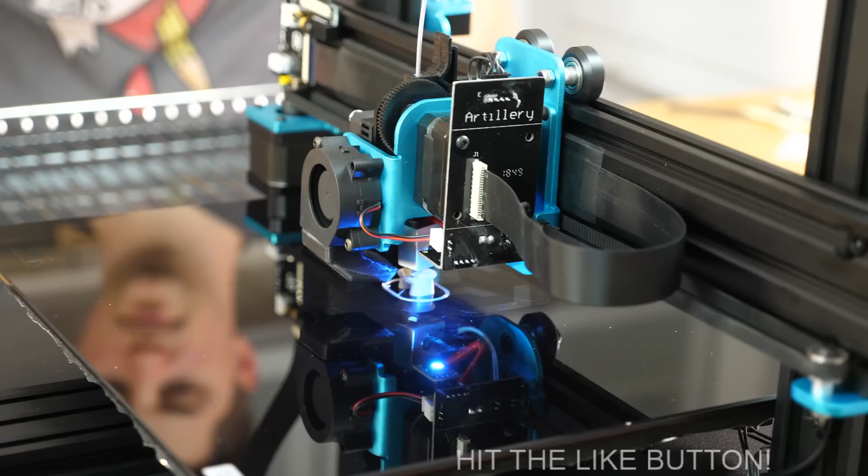We don't have a close-up from the Prusa. So while this is printing, and I think this will be done quite soon, I will be cooking the steak, which was sous vide cooking on the Prusa for the last 1.5 hours. This is something which is really serious - I actually just put a piece of real nice entrecôte steak into a vacuum seal bag.

Well, we should have shown that. That doesn't look too nice at the moment, so I thought I'll leave that out of the picture.

Thomas, yeah, the Blackmagic cards are awesome, I had a great experience with my card. Unfortunately my oldish MacBook didn't really capture and stream and do all that stuff at the same time, so I haven't had any chance to use the card since then. But I actually like the Blackmagic gear in general.

Somebody was asking if the printer is capable of other types of hot ends, and I think we were talking about that before, and yeah, I think it is. It might be an issue just slamming a normal V6 hot end on there, that might interact with the linear rails, but with some minor modification this should actually be possible.

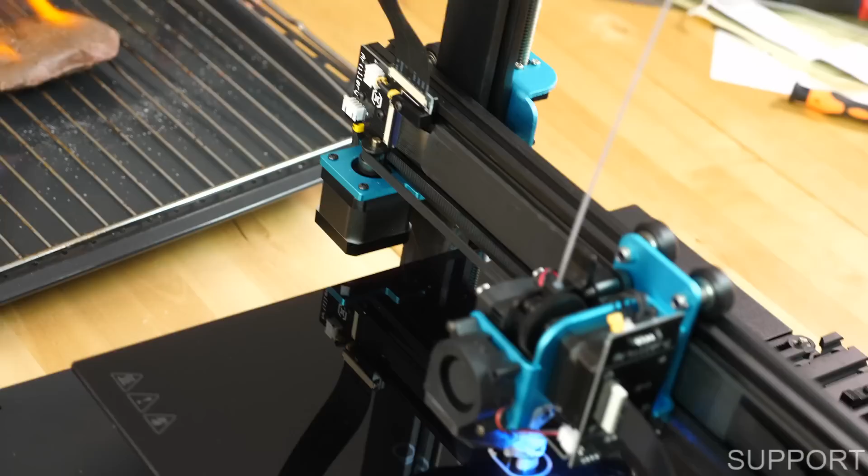How does the Marvin actually look? So far so good, I guess. I get a bit stringy, I think. Yeah, I think the settings were not perfect, but anyways. I mean, that's something you have to tune in for every printer.

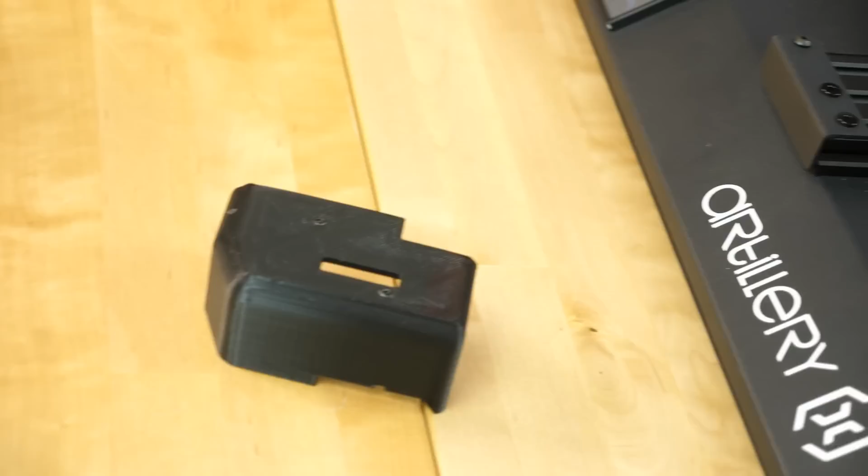Artillery 3D is also in the chat, and they said they provide a profile for Slicer with the machine. I haven't used that actually - I used a standard CR10 profile with just reduced retractions. By the way, there is actually a shroud covering all the hot end stuff, right here, we just had to take it off. In case you missed it, we had to take it off to fix a flat flex cable issue which was preventing the fan from running, but that's solved - we just forgot to put the cover back on.

Yes, and now all vegans and vegetarians please look away. But we have to... this looks perfect as always. It always is perfect - there's a reason this is called CNC Kitchen.

All right, let's see how that looks like. Oh. This looks good, this looks really good.

No, this is not a cooking channel you're currently watching, but we somehow have to kill the time until the print is finished. Oh yeah, and it's really fast. Do we have any progress indicator on the display? I don't think so, right? Yeah, I think we do, I just switched to another screen.

Maybe get the cameras in place. Oh, look at that.

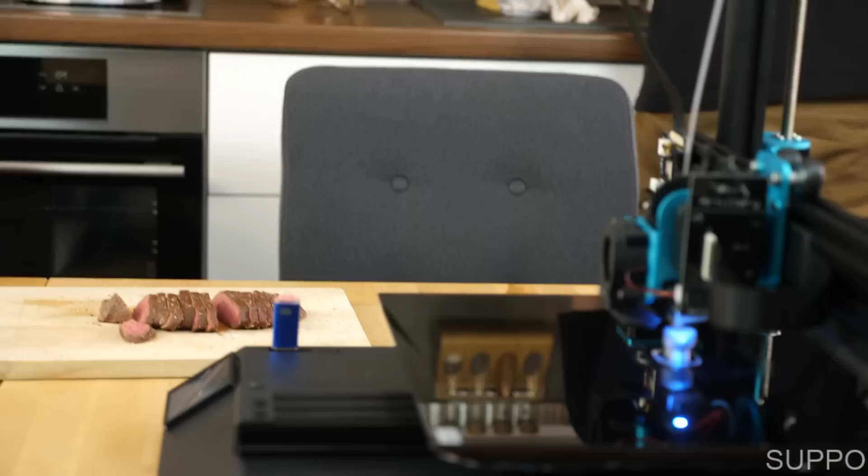So, a perfect steak cooked on a 3D printer. You probably don't see that anywhere else. I guess not.

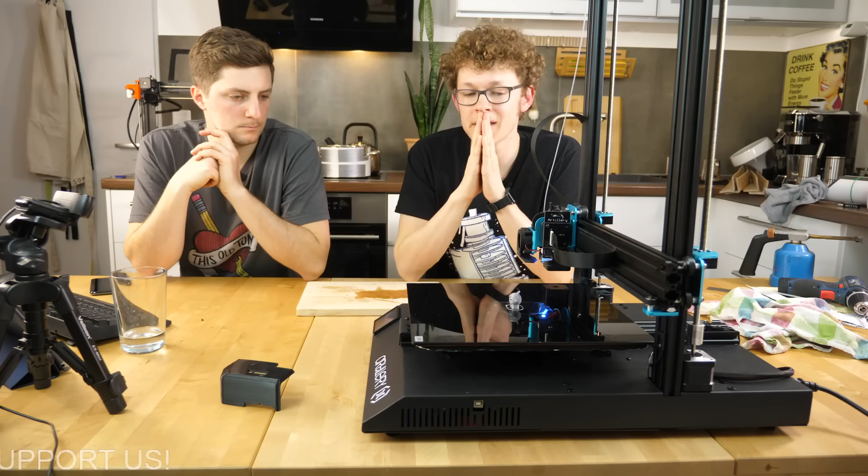Why don't we see many quick change nozzles like for the E3D for the maker market? At MRRF there was actually one company showing their own new printer - I don't remember the name anymore. It's an open source printer which has exchangeable tool heads, same as the E3D. Totally cool design, as I said I don't remember the name. If anybody knows, please put it down in the description or comments. Nice system - I would really like to have something like that on one of these printers, and maybe I might go into that in the future.

All right. So at the end of the day - could you maybe get to the camera again so that we can get a close-up of the print?

Have you tried the Mosquito hot end? No, I haven't tried it so far. It looked really nice when I was taking a look at it at MRRF, but I didn't work on it so far. Okay.

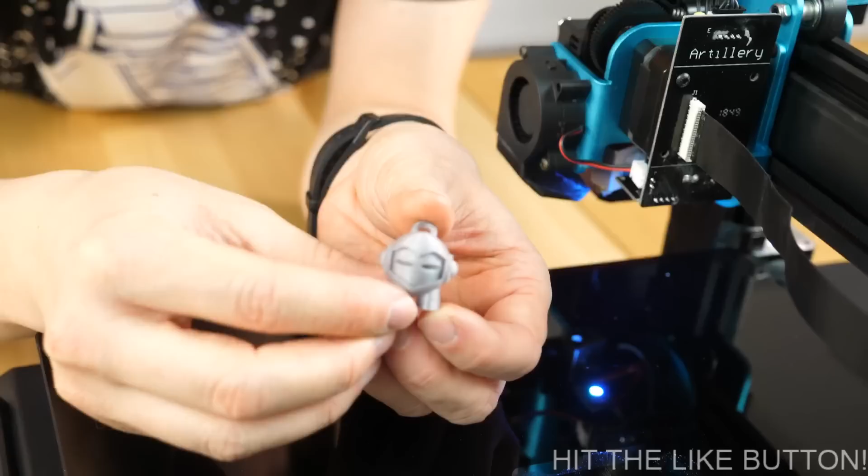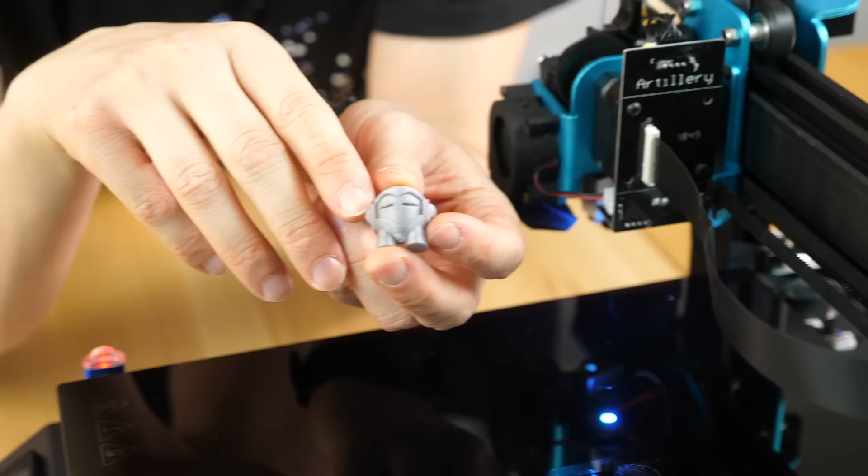The print looks almost perfect - some stringiness right here, the surface is nice, the overhangs are nice. Right here it doesn't look perfect, but this was still the point where we were printing at that really fast speed, so I also don't really complain there. All in all, great printing results, even though we've just been printing the Marvin right here. I will be printing more with this printer in the future, way more, and maybe there will be a review coming up. If you're interested in that machine, check it out in the video description - there are some affiliate links to Banggood and AliExpress. It's currently sold for around $430 to $450.

So quite a bit cheaper than, for example, the CR10S Pro. And so far, it looks really nice. We had some issues with the flat flex cable, but plugging it out and putting it back in again seemed to solve the issue.

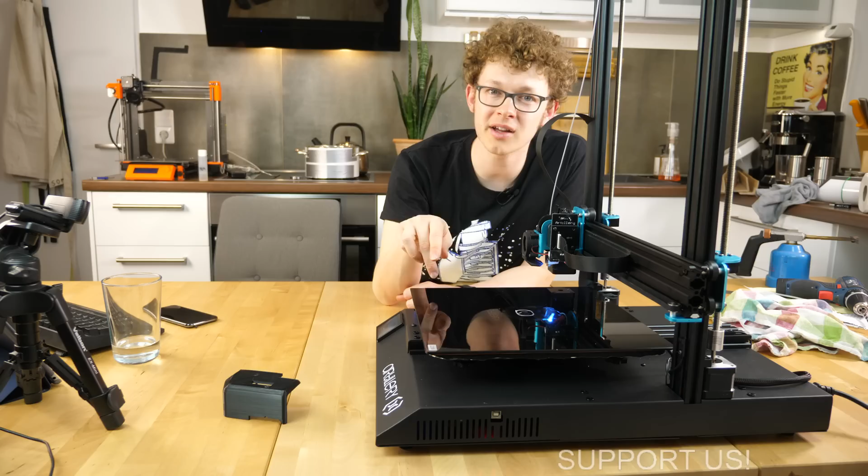The only thing that's a little bit bothering is the fan from the electronics enclosure. I don't really get it, because they have such great surface area on the bottom to put a larger fan in there - it doesn't have to come out of the side. Taking a look at the machine in this first unboxing, the only thing I would really change is putting a bigger fan in here. It's just a shame, because on every other printer you wouldn't complain about that fan, but this printer is such a silent machine except for that one single fan.

Okay, so Jay is just telling me that they have changed the fan. That is really nice to know.

Otherwise, as I said before, it does have a volcano hot end, which means it's a longer hot end compared to the short V6 style ones, which especially helps at high printing speeds. For such a machine, I'm totally honest, I would have preferred the normal style hot end, because that still usually works pretty well. This thing could really shine if you put a 1.6 or 1.8 millimeter nozzle in there and print some really big figurines, because this printer would be able to handle that with the volcano hot end.